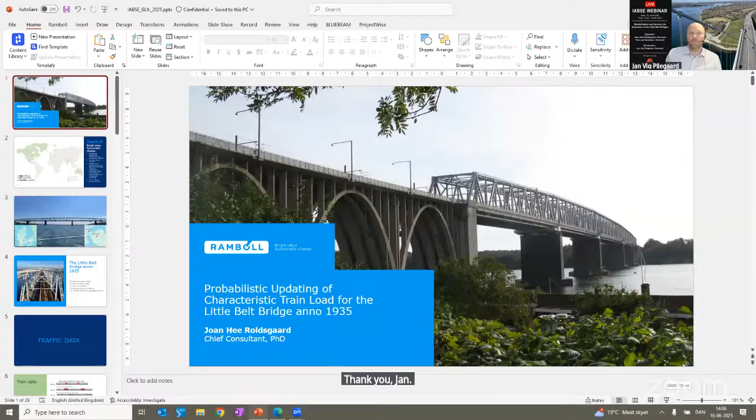Thank you, Jan. Yes, today I will share some insight into the probabilistic analysis that we did to update the characteristic train load for the Little Belt Bridge from 1935. This study was originally performed for Railway Network Denmark in order to reassess the bridge, mainly for a new service platform, but also in order to update the probabilistic analysis, which they have a rule should be updated every 25 years.

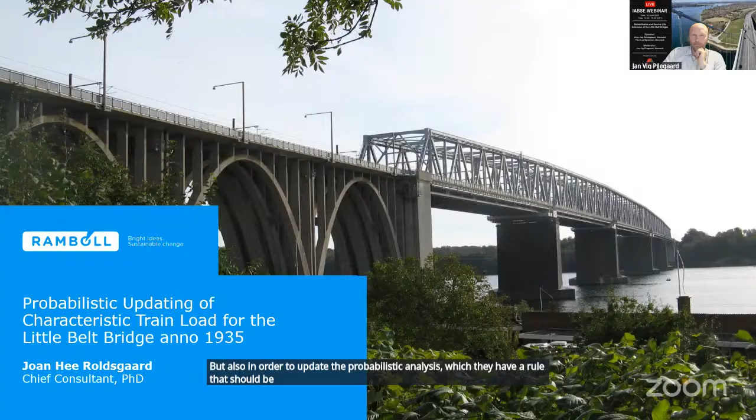So a little about Ramboll in short. Ramboll is a multidisciplinary engineering company. We have more than 18,000 experts around the world in more than 35 countries, over 300 offices. We are founded and have headquarters in Denmark in 1945, and we are a foundation-owned company.

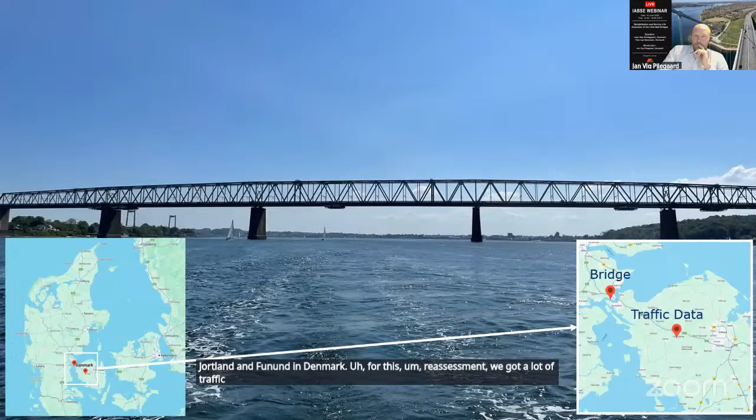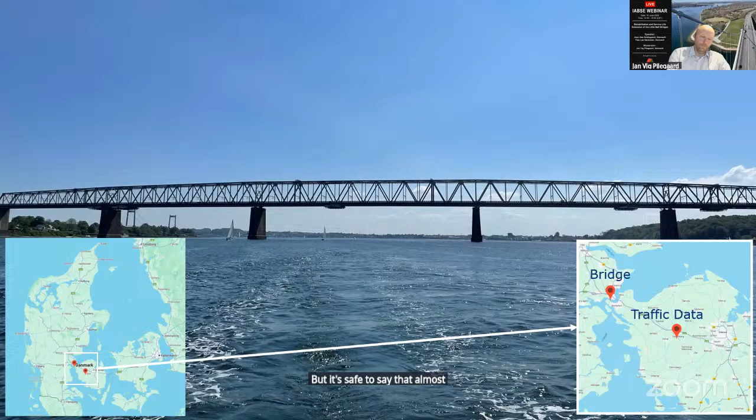So the Little Belt Bridge, that's an old riveted steel girder bridge that connects Jutland and Funen in Denmark. For this reassessment, we got a lot of traffic data from Railway Network Denmark that was recorded at a station in Bred, located on Funen. But it's safe to say that almost every train that passes this measurement station also passes the Little Belt Bridge, so we took that as one-to-one.

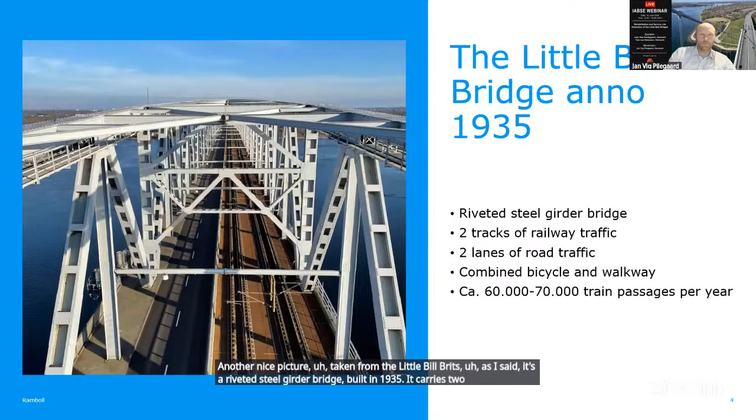Another nice picture taken from the Little Belt Bridge. As I said, it's a riveted steel girder bridge built in 1935. It carries 2 tracks of railway traffic, 2 lanes of road traffic, and a combined bicycle and walkway path. It has around 60,000 to 70,000 train passages every year. It should also be said that it's the main bridge carrying train traffic from Germany to Sweden and so on in the Nordics.

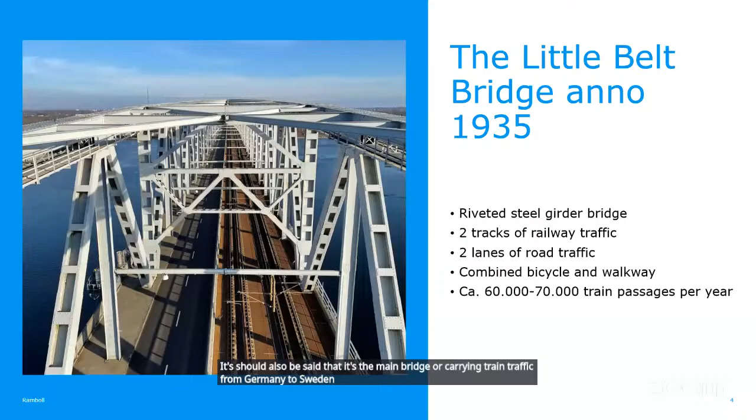A little bit about the traffic data that we have. We have almost 5 years of traffic data from the measurement station. For each train that passes, we have a unique train ID, a timestamp for each axle, axles per train, weight of each axle, the speed, the direction of the train, and the train type. Here you also see some of the train types. On the top, you see most of the passenger trains, then we have the locomotives, and then at the bottom, you can see the types of freight trains and wagons that you can experience on the bridge.

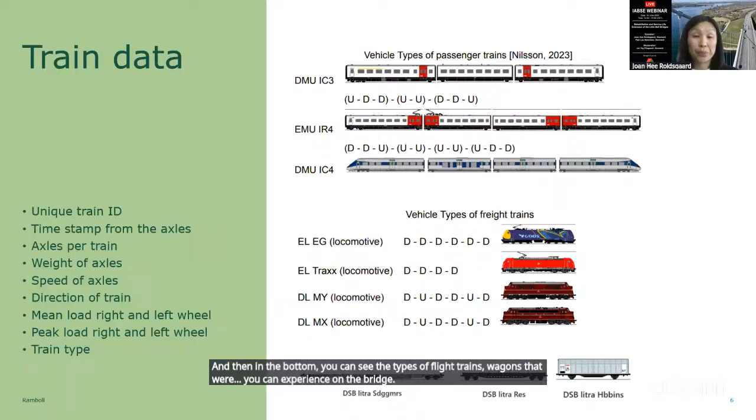Around 60 to 70,000 trains pass every year. It's almost equal in the eastbound and westbound rail, and it has more than around 1 million axles in each direction.

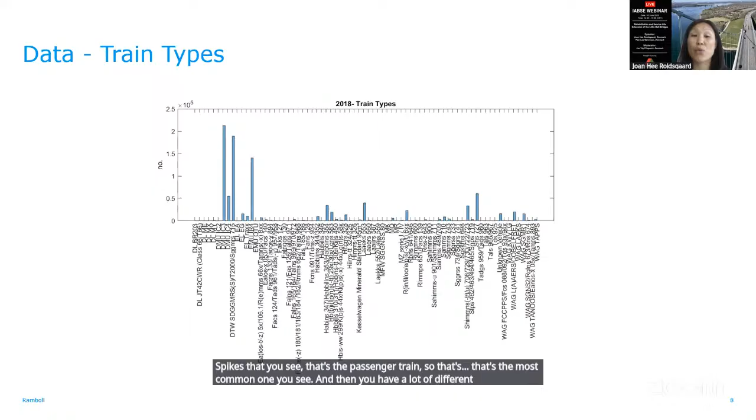To give you a little insight into what kind of data we were dealing with, I plotted all the train types passing the Little Belt Bridge for a given year. The high spikes you see are the passenger trains, the most common one. Then you have a lot of different types of freight trains that pass the bridge.

Some of the things you could also look at were the distance between axles, which varies quite a lot, from almost no distance to quite large distances per axle. Then we also have the axle load, which varies depending on whether it's a freight train that's loaded or unloaded, or a passenger train. You can see several spikes, not a clear distribution form.

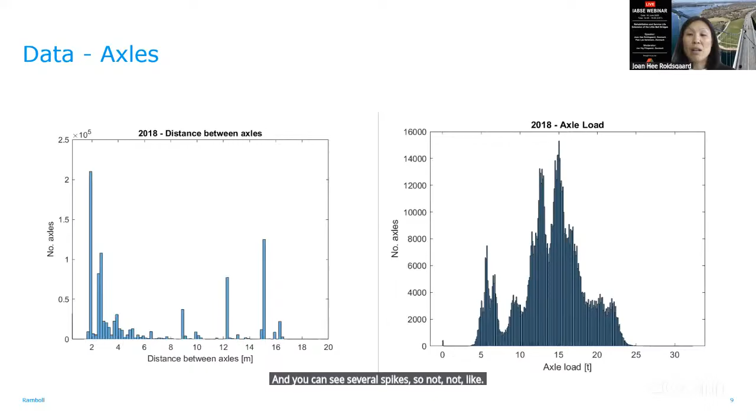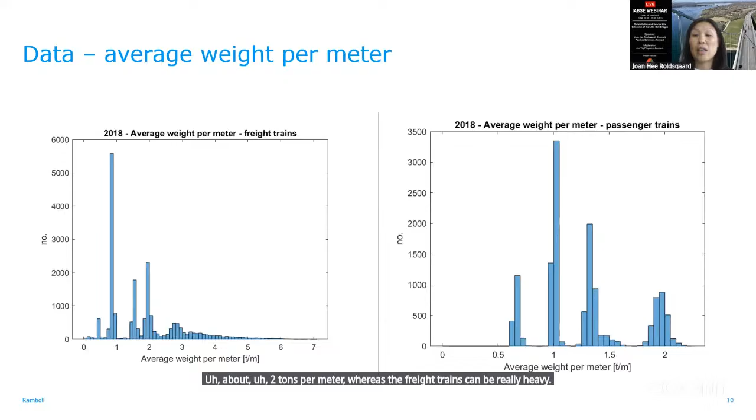If you take the average weight per meter for the freight trains and the passenger trains, you can easily see the freight trains can be much heavier. The passenger trains almost never have a meter weight above 2 tons per meter, whereas the freight trains can be really heavy and also really light if they don't have any goods on the wagons.

So a little bit on how we determined the characteristic load to be used in the reassessment of this bridge, based on the train data.

It was the average weight over 165 meters that mattered, which also excluded the passenger trains, so we could focus more on the freight trains.

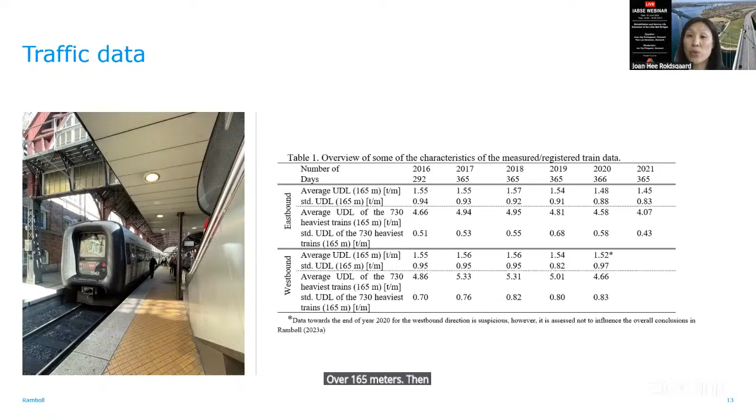A little bit more into the data. If we took the average UDL, the uniform distributed load, over 165 meters for all trains, you can see from the data, both eastbound and westbound, that you get a mean around 1.5 to 1.6 tons per meter, and actually a quite large standard deviation around 1 ton per meter.

Whereas if we only looked at the tail, the 2 heaviest trains per day and the 730 heaviest trains per year, we got an average around 5 tons per meter and a quite lower CoV of around 10%, so a standard deviation of 0.5. It was a little bit higher for the westbound than the eastbound data.

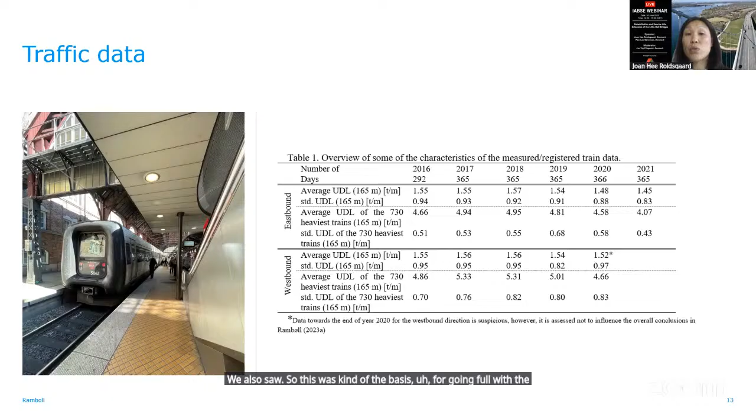So this was the basis for going further with the 2 heaviest trains per day, or the 730 heaviest trains. Just a little bit of comparison.

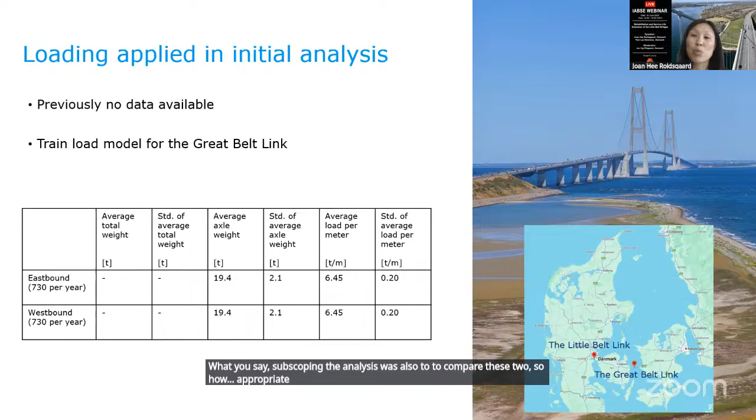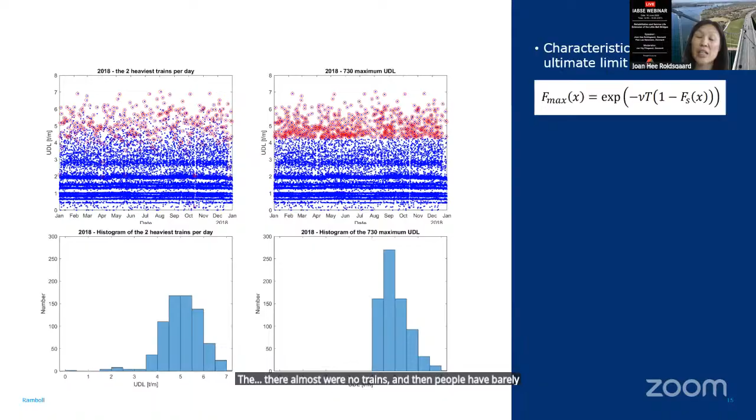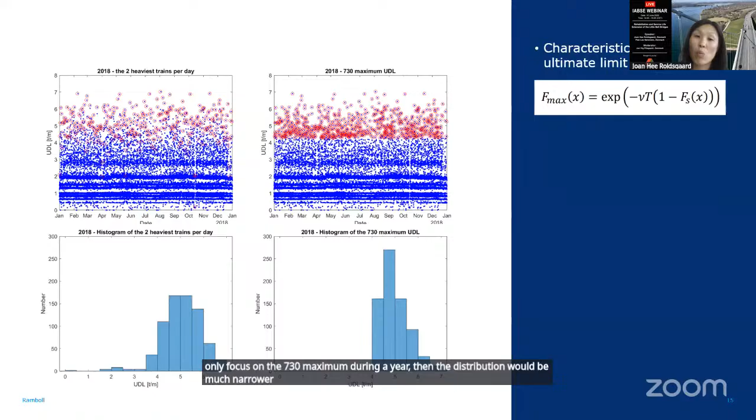When we look at the 730 heaviest trains, or 2 heaviest trains per day, you can see from the figures to the left that there are some days where, due to maintenance of the tracks or other interruptions of train traffic, there were almost no trains, giving really low values and a really large standard deviation or coefficient of variation. Whereas if we only focus on the 730 maximum during a year, the distribution would be much narrower and have a more tail-like extreme value distribution shape.

So in order to calculate the characteristic load, we use the extended Poisson process, and the distribution you see here would be the Fs in the formula to the right.

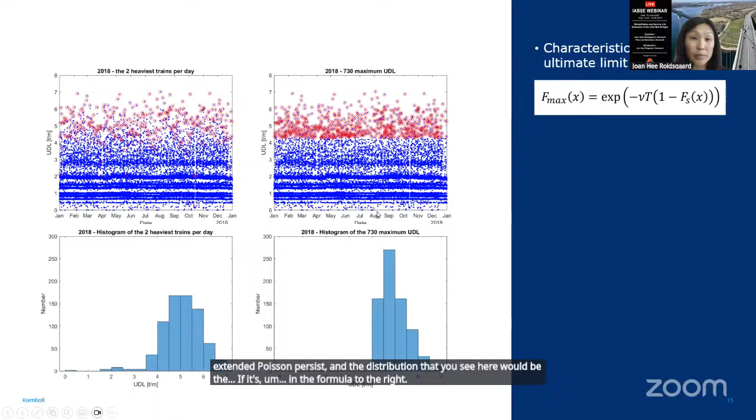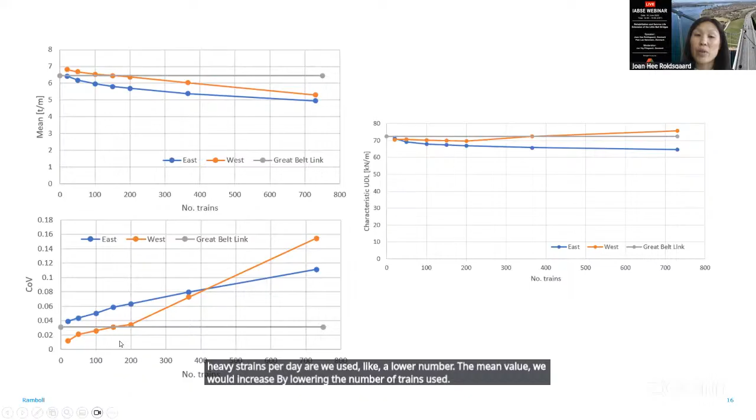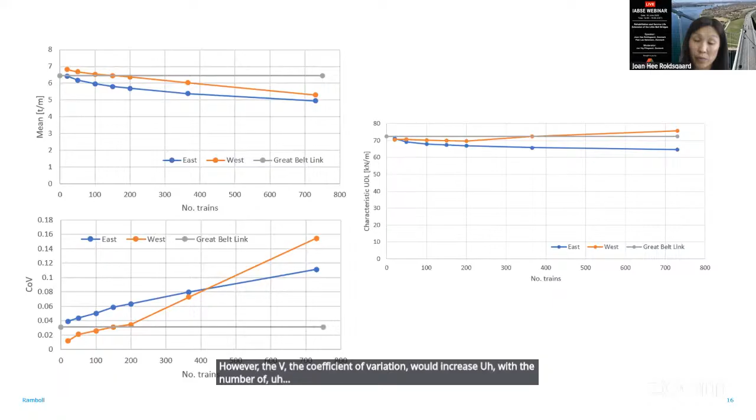So a little bit more into the data. Depending on whether we use the 2 heaviest trains per day or a lower number, the mean value would increase by lowering the number of trains used. However, the coefficient of variation (COV) would increase with the number of trains used in a given year.

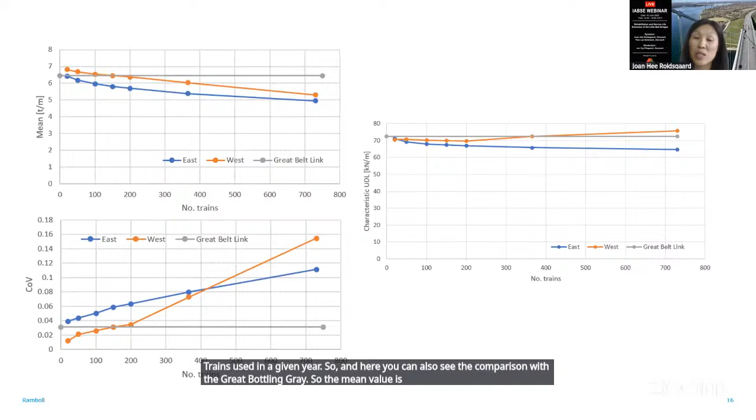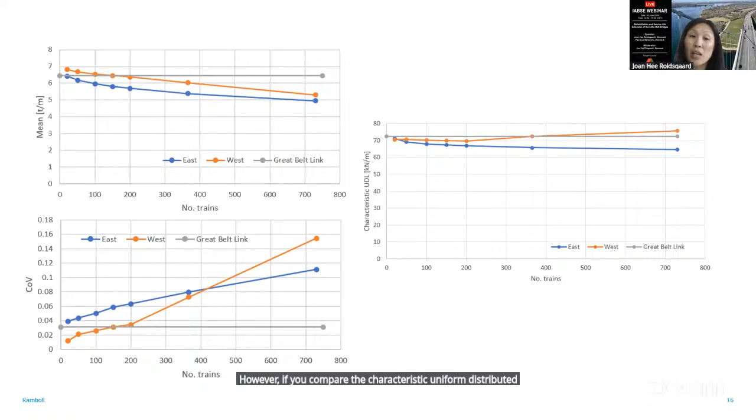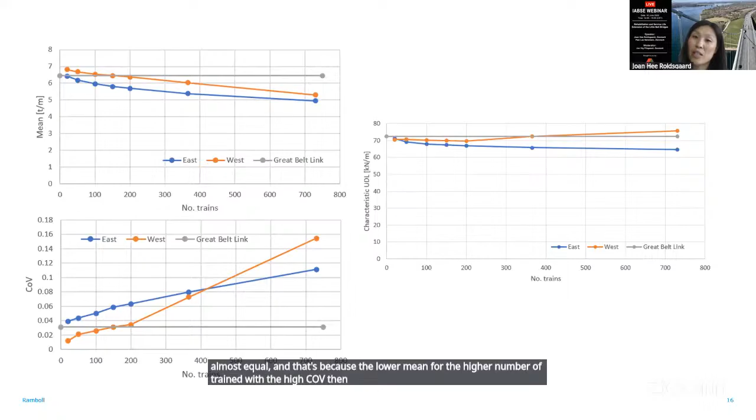Here you can also see the comparison with the Great Belt Link in gray. The mean value is right around the same, whereas the COV is higher for a lot of the values. However, if you compare the characteristic uniformly distributed load, it's almost equal. That's because the lower mean for the higher number of trains with a high COV entails that you get longer out in the tail, whereas if you have a really narrow distribution with a high mean and a low COV, you get around the same value in the characteristic value.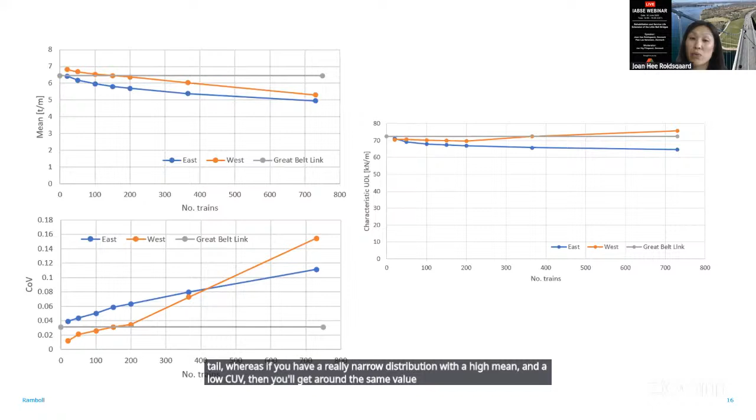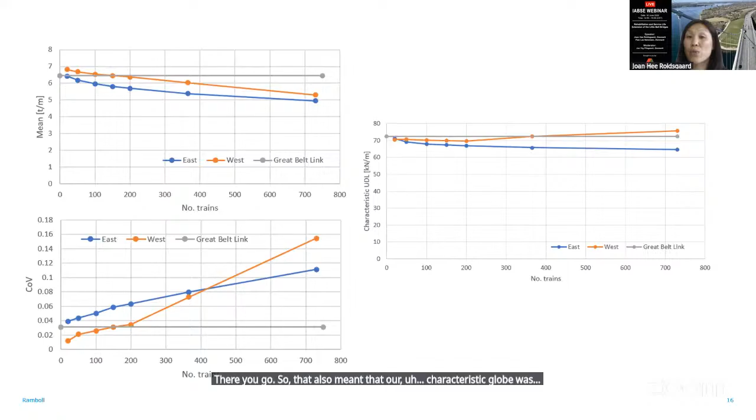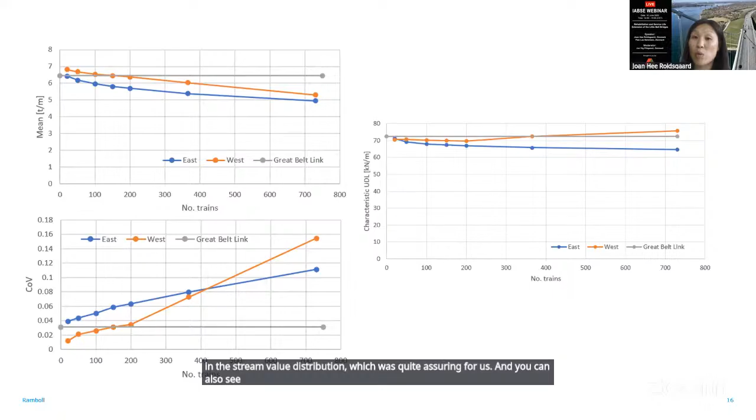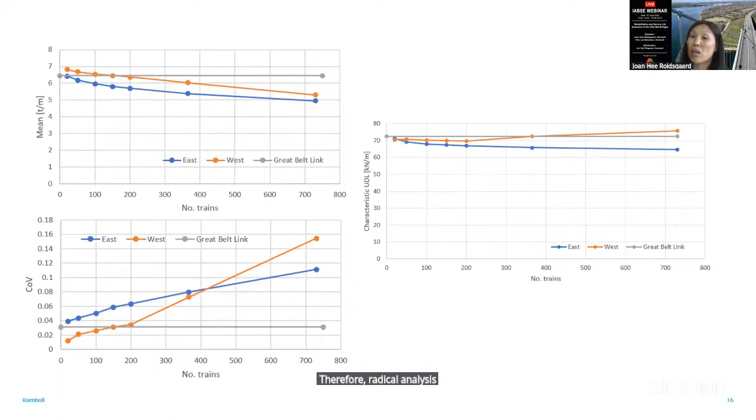So that also meant that our characteristic load was quite robust in terms of the number we picked to take into account in the extreme value distribution, which was quite assuring for us. You can also see that when we compared with the Great Belt Bridge, their assumption, even though they didn't have the same amount of data to build their theoretical analysis on, was also quite good. So we ended up saying that 7.2 tons per meter would be an okay characteristic load to use in the reassessment.

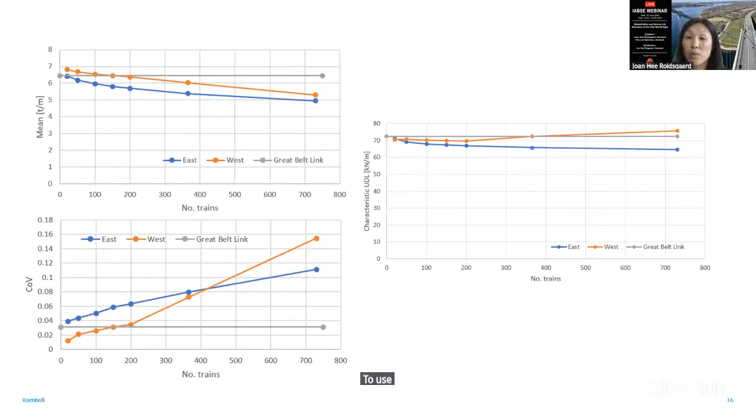So what's the probability of having two heavy trains on the bridge, both having a really high average load rate over 165 meters?

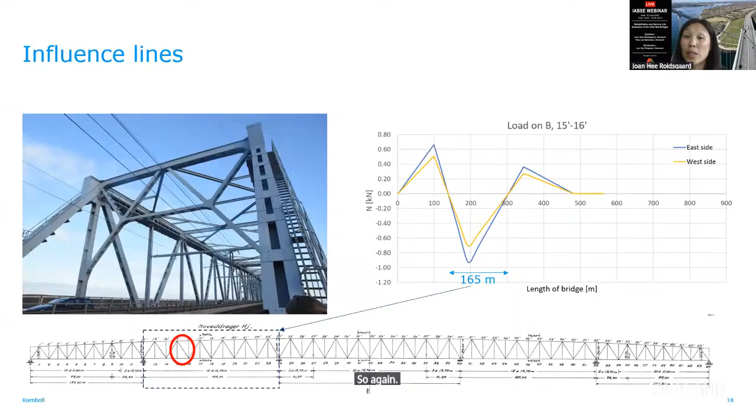Again, we looked into the same main girders and the same influence line, so nothing changed there. Then we looked into the meeting event, and because we didn't have data from the actual bridge, it was a little bit difficult to connect in real life, so we made an assumption. We took the measurement station and the meeting event they had at that station and moved it artificially to the bridge, saying that if two trains are just having axles on the bridge at the same time, they would meet at the most critical location. We thought this was a conservative assumption, but because we didn't have data from the actual train, we thought that would be okay.

Again, you see the comparison with the Great Belt Bridge, where we have the load reduction factor on the second track of 0.77. We could see from the data that we would get a lower value by using these conservative assumptions, no matter how many points we were using in the extreme value analysis. So definitely, if we went with 0.77, that would be a conservative assumption in the reassessment as well.

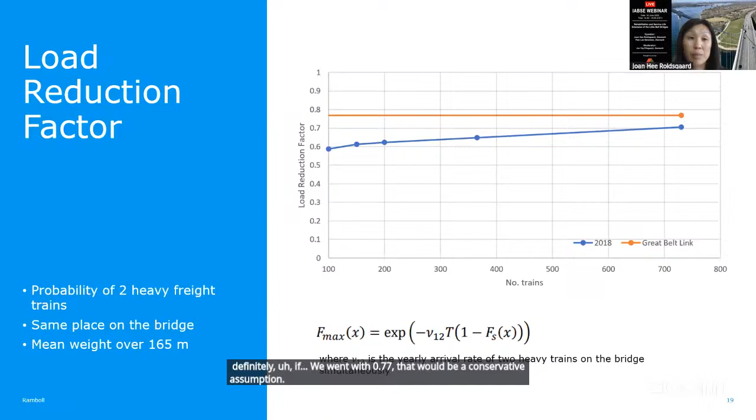One of the subscopes of this analysis was also to update the reliability analysis with the new stochastic traffic load model. Because it was an update of the existing probabilistic analysis, we didn't change most of the stochastic distributions as input parameters to the reliability analysis. The main parameter we looked at was the train load model, which we updated to reflect the stochastic model we developed with the new data from the Rail Net Denmark.

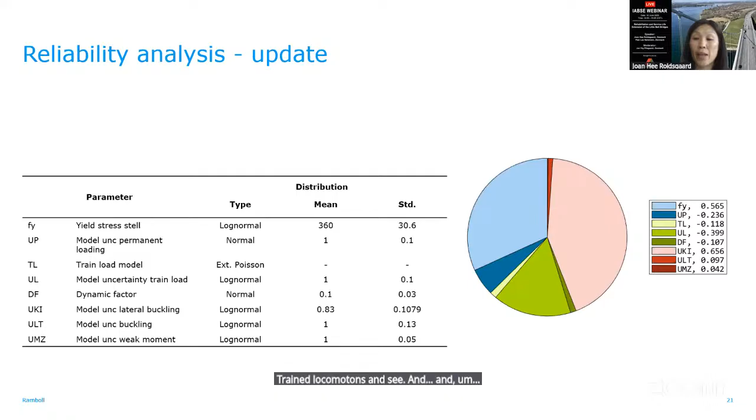The conclusion for the reliability analysis was that we got above the minimum threshold of a beta of 5.2, which corresponds to a failure probability of 10 to the minus 7. We used the updated stochastic load model developed through data, the stochastic models of resistance developed earlier, and model uncertainties based on the newly published guideline for reliability-based classification of existing bridges by the Danish Road Directorate.

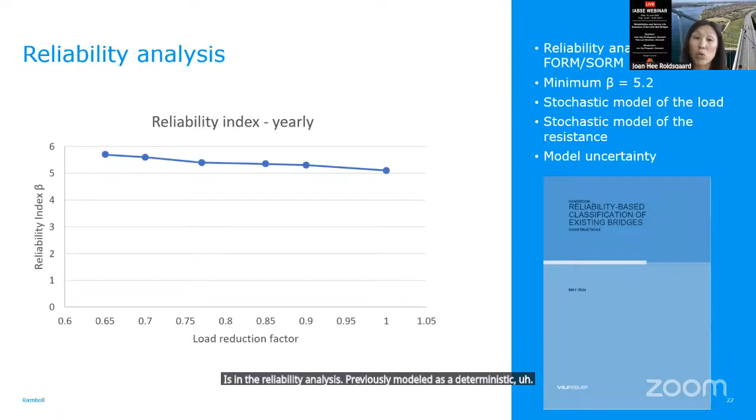We also looked at how the reliability index developed as a function of the load reduction factor. This factor is in the reliability analysis previously modeled as a deterministic parameter, saying that you could use a load reduction factor of 0.77. That was the baseline, which gave a reliability index above 5.2.

But we wanted to study also what if we went up to saying that we don't have any reductions on the second railway track, having two heavy trains on the bridge at the same time. There we saw we could almost comply—we still have a reliability index above 5, but just below 5.2.

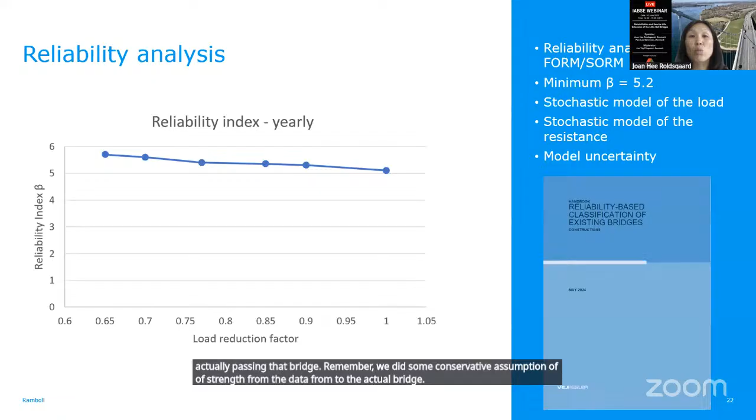This means that right now Railway Network Denmark has some restrictions on the bridge regarding having two heavy freight trains on the bridge. If we had more reliable data about when they were actually passing that bridge—remember, we made a conservative assumption of transferring the data from Bred to the actual bridge—then it might be possible for them to waive this restriction.

We also looked into the fatigue and lifetime of this bridge, which, since it's 90 years old, is also a concern for the Railway Network Denmark. The fatigue critical detail was already defined and identified, right under the tracks - that's the crack you see here to the right.

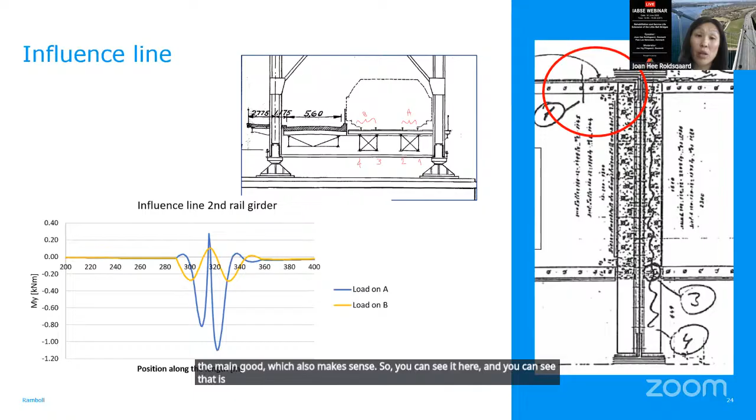The influence line for this fatigue critical detail is much smaller than for the main girders, which makes sense. You can see it here, and the influence line is different depending on whether the train is on track A or B.

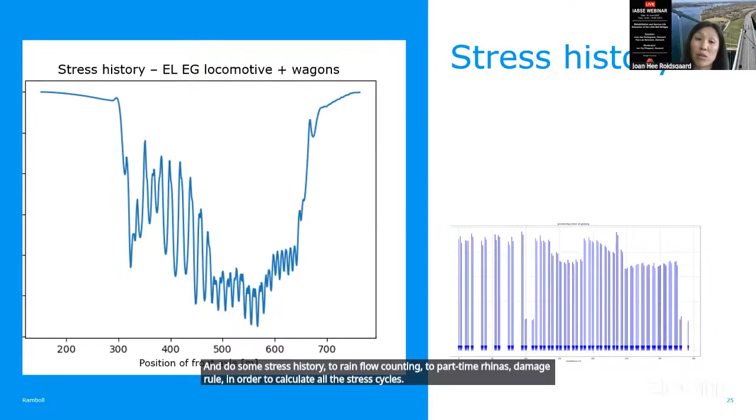First of all, it was computationally cumbersome to drive all the trains over the bridge and do stress history, rainflow counting, and Palmgren-Miner's damage rule in order to calculate all the stress cycles. But we did that for around 5 years of data.

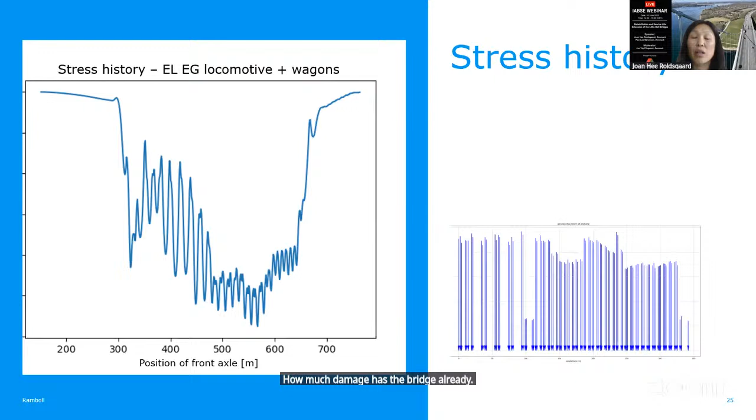Then we did a bit of probabilistic timeline extension, back in time and into the future, in order to assess how much damage the bridge has already undergone and how much lifetime it has left.

We also know that the Femern Belt will open within a few years, and that will relieve the Little Belt Bridge of some freight trains, which would mean even more lifetime in this fatigue critical detail.

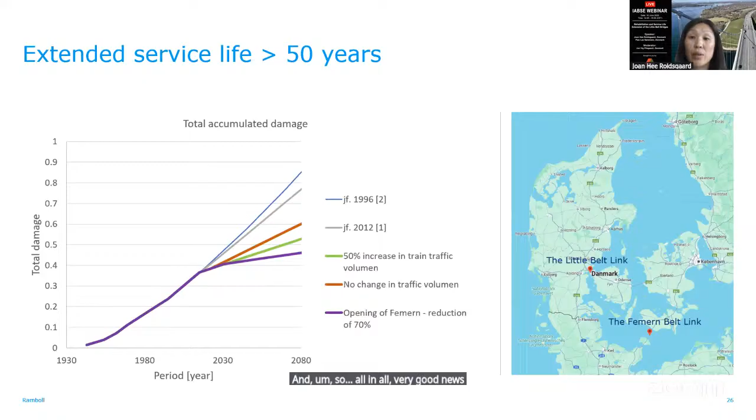So, all in all, very good news for Railway Network Denmark in terms of fatigue life for this bridge.

Thank you for listening in. I look forward to your questions at the end of this session.

So, Pau - yes, thank you, Jan. I'll see if I can figure this out. Just wait for it.

I hope you see my screen - at least we do. My name is Paw Lee Sørensen, I work at COWI, based in Copenhagen, Denmark. COWI is a quite big consulting company with about 8,000 persons globally.

My topic today will be the new Little Belt Bridge, and what experiences we have with repairing fatigue cracks in an orthotropic steel deck.

The agenda for today: first I'll give a short introduction, then I'll talk about the bridge structure and the observed cracks we saw in 2017. I'll briefly touch on some study of repair methods, the mock-up, and the method statement we prepared.

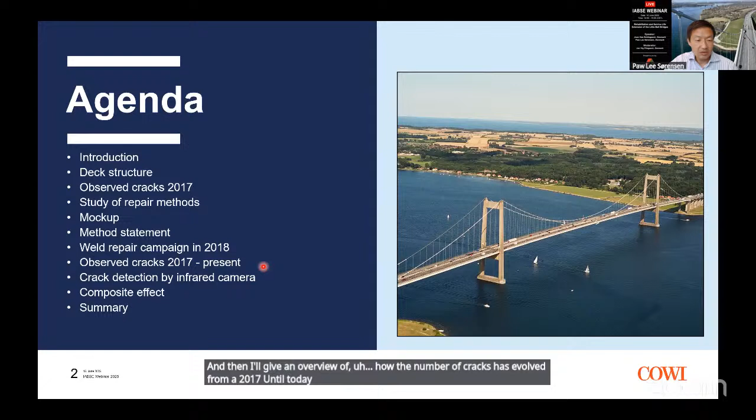Then in 2018 we launched a repair campaign. I'll give an overview of how the number of cracks has evolved from 2017 until today, and briefly introduce an alternative method for crack detection by infrared camera.

In the end, I'll touch a bit on the importance of the condition of the surfacing and what influence it has on the composite effect, and then lastly, a summary.

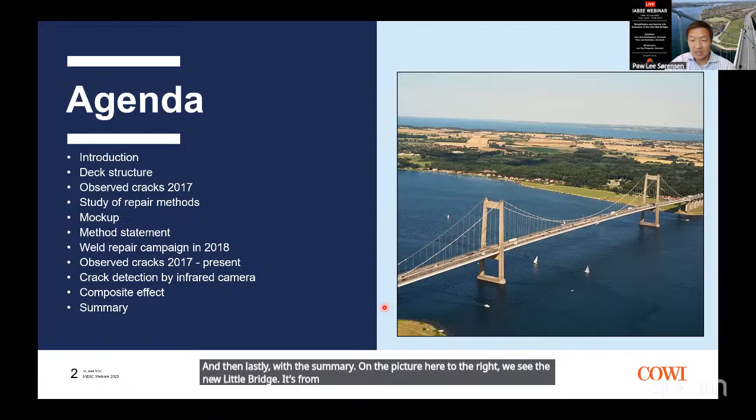On the picture here to the right, we see the new Little Belt Bridge. It's from 1970, and it's a suspension bridge with a steel deck.

Similar to the Little Belt Bridge of 1935, it's located between the island of Funen and mainland Jutland. It was opened in 1970, and it carries 3 traffic lanes of road traffic in each direction, with about 85,000 average daily vehicles.

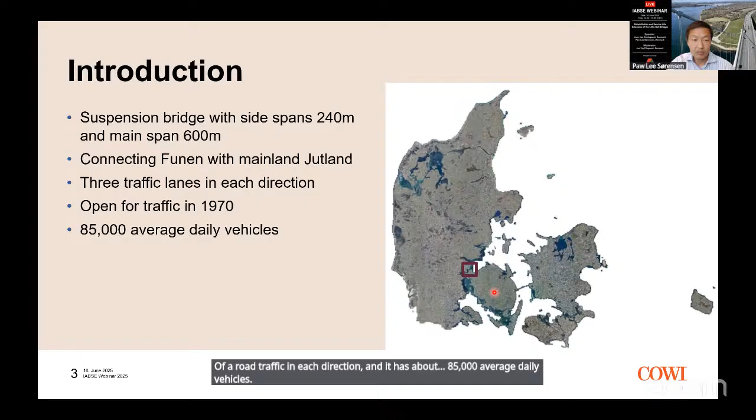The bridge deck is a closed steel box girder. It has a width of 33 meters and a height of 3 meters, and typically we have a 3-meter spacing between plated bulkheads. The deck structure is composed of 6 millimeter troughs, 250 millimeters height, spaced at 600 millimeters.

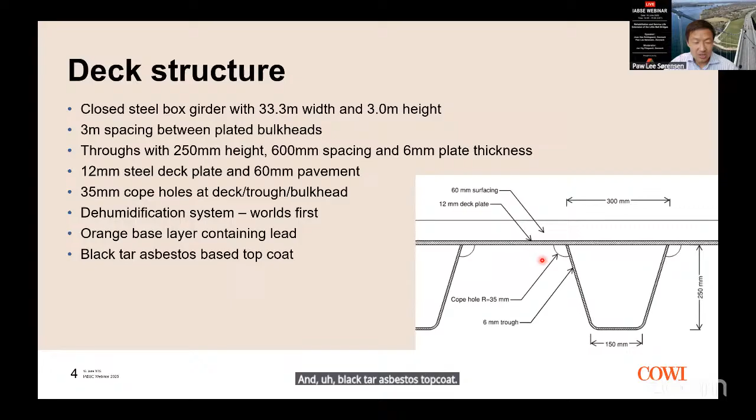And then we have a 12 millimeter deck plate and a 60 millimeter surfacing. At the plated bulkheads, we have cope holes of 35 millimeters. It's also quite important to notice that the inside of the box girder is protected with a dehumidification system, which I believe was the world's first. Despite having this system, you could say the designer didn't trust it as much, because they also provided painting. So it has an orange base layer, actually containing lead, and a black tar asbestos top coat. So it's indeed very well protected for corrosion on the inside.

The Road Directorate performs visual inspection typically every 5 or 6 years. And in the summer of 2017, we conducted a general visual inspection with an emphasis under the heavy lane and close to the expansion joints.

We observed 10 fatigue cracks located in the weld between the trough and the deck plate. Most of them were below the slow lane, which we see here, at trough numbers 14 and 17. In this picture I've highlighted the actual crack, but it extended quite far from the bulkhead, and then after around 20 centimeters or so, it moved down into the web of the trough.

These cracks were observed by visual inspection, and in order to confirm them later that year, we did a special inspection with NDT, UT and ET that confirmed our suspicion that these were actually cracks. We also performed NDT inspections of areas where we hadn't seen cracks by visual inspection, and there we didn't observe any cracks with the NDT either.

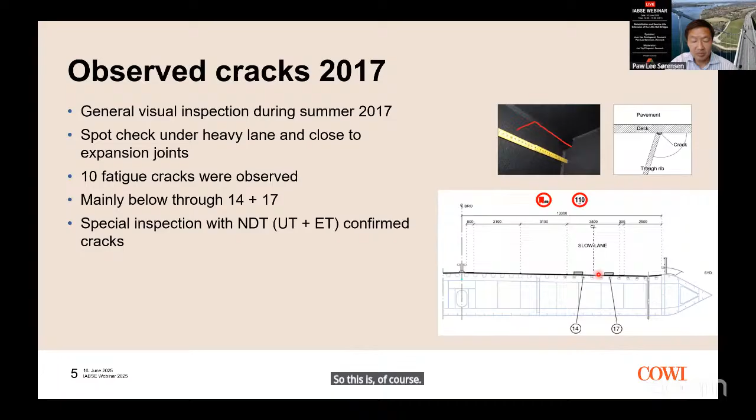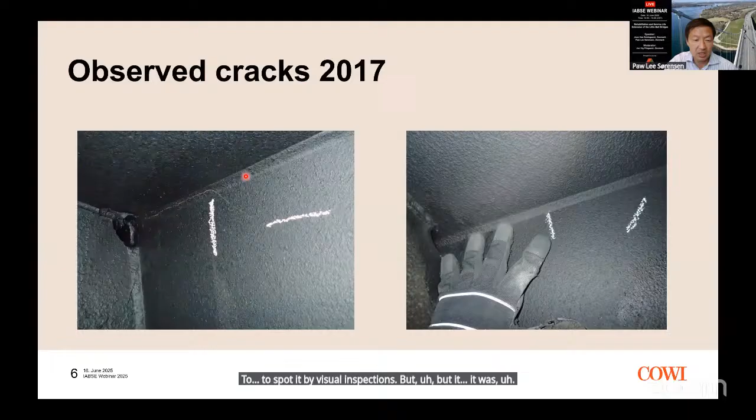This is of course quite alarming to observe fatigue cracks. Here I also have a picture where you can see it a bit more in detail, with the orange base layer and the black top coat. So it was possible to actually see the cracks. I would say that if the base layer had not been orange, it would have maybe been more difficult to spot by visual inspections. But it was possible because we had this combination of paint colors.

After discovering the cracks, we did a study of repair methods, and we came up with 11 strategies. The first one was to do nothing. Then we considered moving the traffic lanes about 0.6 meters, drilling stress relieving holes at the crack tip, bolting steel plates over the welds, also weld repairs from inside of the box in various forms, and lastly to replace the asphalt surfacing with a high strength concrete overlay with steel fibers.

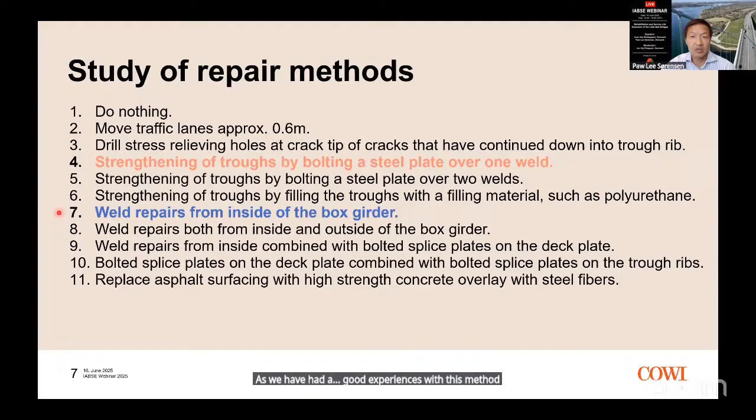In the end, we opted for strategy number 7, weld repairs from the inside, as we've had good experiences with this method on previous projects where we have seen fatigue cracks.

In order to repair these welds, we thought it would be very beneficial to perform a mock-up to simulate the weld repair. The mock-up had 2 purposes: first, to confirm the WPQR and WPS and the method statement, and secondly, to train the welder under realistic conditions.

Here we see a photo of the deck plate in the correct height and the scaffold as it would be during the repair. The welder can then perform his weld and immediately look from the inside at the result. It was quite important to perform this training, as the welder then had the opportunity to dial in his settings with regards to speed and position, etc., and then could check it quite quickly.

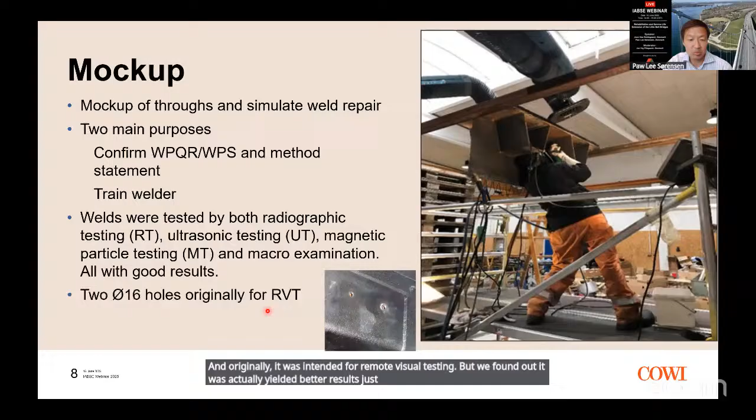The end welds were tested both by RT, UT, MT, and macro examination. During this trial, we also had the idea to drill 2 holes in the trough on the opposite side of the weld with 16 millimeters diameter. Originally it was intended for remote visual testing, but we found out it actually yielded better results just to use a smartphone and a flashlight in each hole.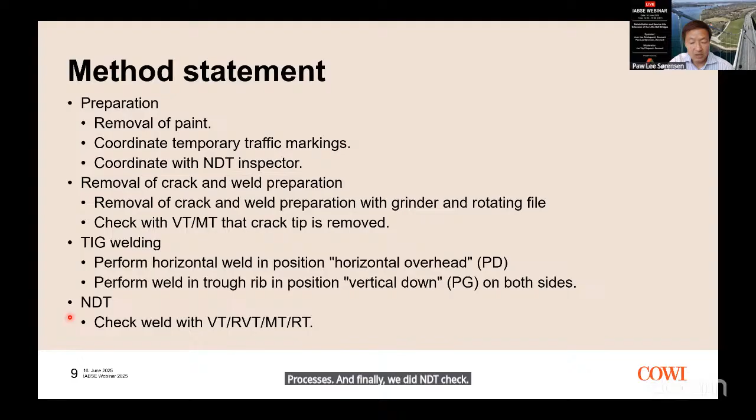After working on the mock-up, we prepared the method statement with the main headlines being preparation, so removal of this poisonous paint, coordinate with traffic and NDT, then remove the crack with a grinder or rotating file, check with NDT that the crack was indeed removed, and then weld repair by TIG. We opted for TIG welding as it has better control of the welding, and we were not really concerned about the lack of productivity compared to other weld processes. Finally, we did an NDT check to confirm that we had no cracks.

So in 2018, we conducted this weld repair campaign. It's important to notice that we did not close the traffic above the weld repair locations.

And the campaign ended with a cost of about 6,500 euros per repair, based on 10 weld repairs. Here it's worth noticing that 25% of the cost was due to removal of the paint.

Some of the lessons learned from this campaign in 2018 was that it was really important to exercise great care when removing the weld and not make the gap too big. Also, we found that we could get high quality pictures through these two 16 diameter holes.

I have a picture here on the top, from the outside, and this picture is from the inside welded, where we have the deck here and we have the trough here. So it was quite nice to actually get a visual observation of what the crack, what the welding looked like from the inside.

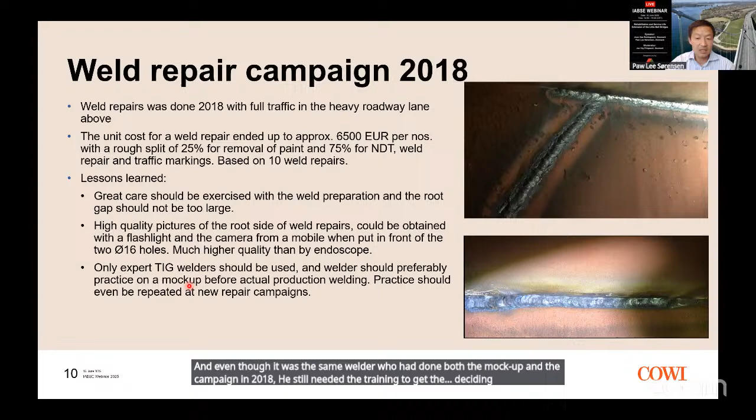Then I think maybe one of the main lessons learned was that it is very, very important to use an expert TIG welder that has been trained on a mock-up before doing the actual welding. Later, I think it was 2019, we also did some repairs, and even though it was the same welder who had done both the mock-up and the campaign in 2018, he still needed the training to get the settings really dialed in before going on the actual bridge.

So currently, we perform visual inspections on a yearly basis. The Road Directorate has entered a framework agreement with a contractor for 3 years, and we have identified 5 types of weld repairs. The bulk of it, 70%, is one called type 1, which is quite small. Then 27% is type 2 with a length of 10 to 100 millimeters. The remaining are types 3 to 5, but the bulk of it is quite small welds.

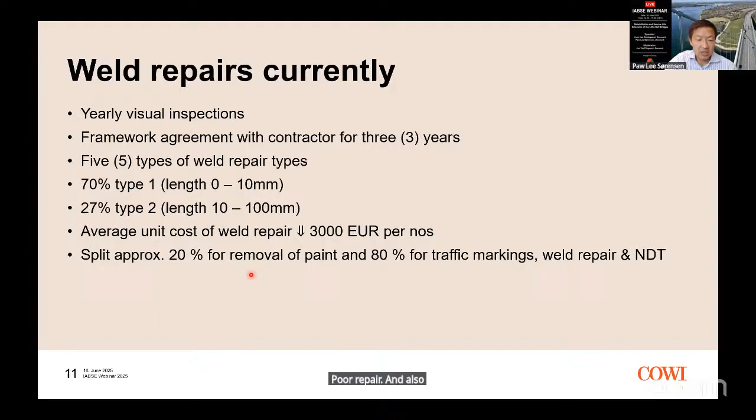And now we have an average unit cost that is down to 3,000 euros per repair, and also the split has been slightly changed.

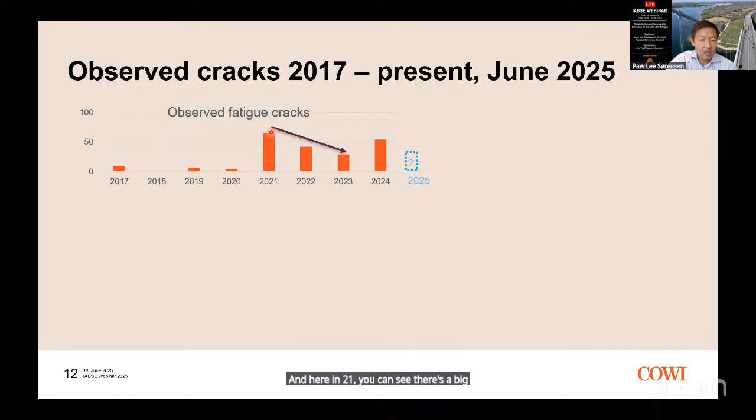So back in 2017, we observed 10 cracks. We didn't perform the inspection in 2018. Then we saw a few in '19 and '20. And here in '21, you can see there's a big jump in the number of cracks observed. That is mainly because we then in '21 extended the area of observation. You have an expansion joint here, one here, one here, and one here. The first years, 2017 to '20, the main focus had been in the areas close to the expansion joint. But then when we extended the observation area, we see this large jump.

Then we had hoped that since the number of observed cracks had a downtrending line, we would be quite low in 2024. But unfortunately, that didn't happen. We had again a quite big jump. And in 2025, we haven't done any visual inspection yet.

So in total, we have 157 fatigue cracks detected. That was by visual inspection. We were quite fortunate to have this combination of paints that allowed us to see relatively clearly if there's a crack. But we also investigated if there are alternative ways of identifying the cracks.

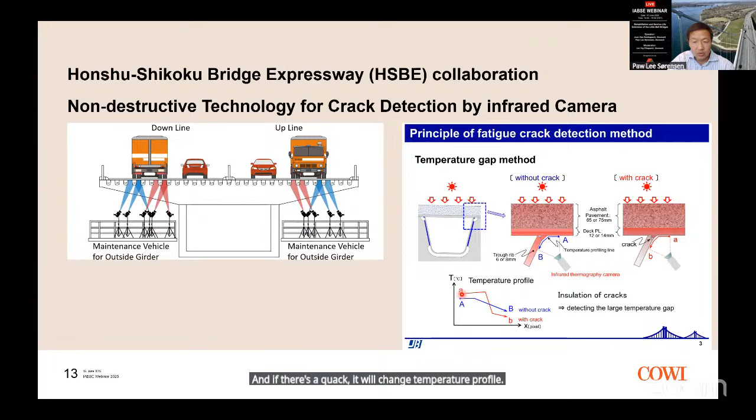So in 2024, some team members from HSBE visited Denmark and conducted some trial tests of their technology. We see here a differential image where in the red line there's no crack, representing this line here. And in the blue line here, you see the temperature profile changes shape. So by this method, they identified 3 small cracks that we had not yet observed by visual inspection. And there are some photos of their setup here to the right. That can be quite an effective way also to identify fatigue cracks.

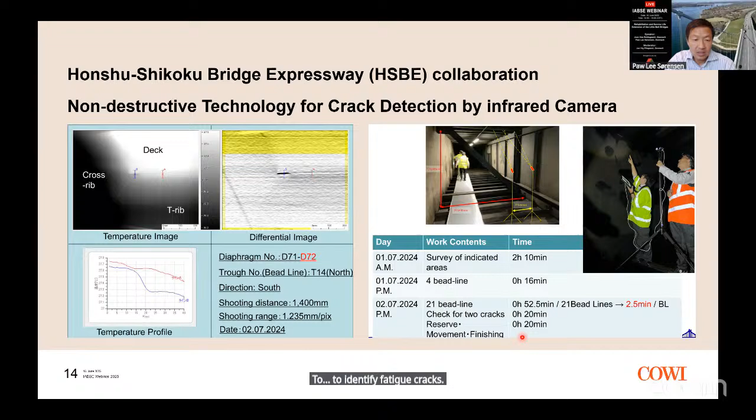Then lastly, I'll talk a bit about the importance of the surfacing and in regards to the composite effect. COWI has performed a monitoring campaign of steel stresses, both for the new Little Belt Bridge and the Great Belt Bridge, which also included temperature measurement of the surfacing.

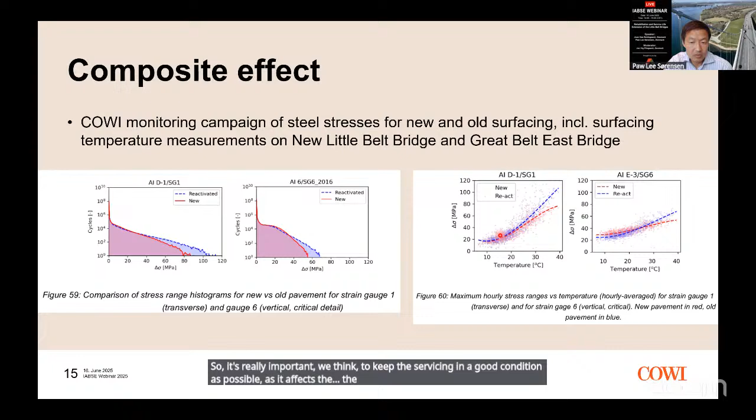So to sum up, the new Lillebælt is a steel bridge opened in 1970. The codes of that time, it was designed in the mid-60s, did not address fatigue issues, but the designers actually performed some fatigue tests and looked quite a bit at the history of steel bridges, mainly in the UK and Germany at that time. But they ended up with a deck plate that's 12 millimeter thick and 6 millimeter troughs, which is a bit smaller than the current Eurocode recommendations.

We also see that when we look at the quality of the fabrication, it's clearly not as good as what we have today. We have done some fatigue damage analysis, which I haven't touched upon here, but based on that, we will expect fatigue cracks under the slow lane at some point.

So a deck of this structure that has this detail repeated thousands of times can be really, really costly to the bridge owner. And for the New Lillebælt Bridge, we have about 100 kilometers of trough-to-deck-plate welds. So it can really be quite costly.

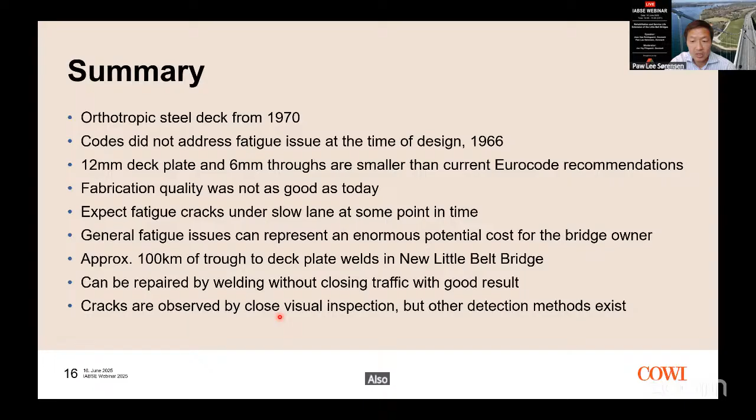So that was it from my part. Thank you for your attention, and I'll look forward to elaborating in the Q&A comments afterwards if there are any questions. So Jan, I'll stop sharing.

Thank you, Paw. Great presentation and very interesting. There's already a lot of questions, so I think I'll just take them from one end to the other.

The first one is to you, Johan, from Petredan, asking why was the real traffic across the old Lillebælt Bridge used? Were the Eurocode rail load models not covering real traffic, or was this a refinement to optimize the analysis?

First of all, thank you for the question. More in general, working with existing structures, I would say the Eurocode gives a nice framework. However, when we look at existing structures, there can be, as you mentioned yourself, room for optimization or refinement of the analysis, simply because if we were to apply the Eurocode load for all existing structures, a lot of them would fail in general. For this particular bridge, the Eurocode certainly could have been used, but it would give a much more conservative load than was actually on the bridge. I think there was a need for refinement and optimization of the load in order to have room for the new service platform. And also in the fatigue analysis, it was really nice to have the real data to work with in order to extend the fatigue life as much as possible for the client.